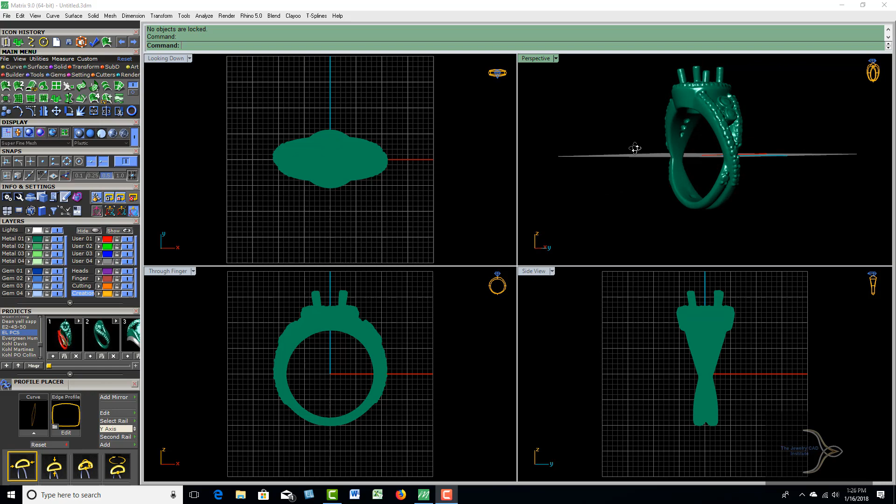We've brought this in as an STL file, and our workflow is going to be trying to make a wedding band that'll go along the side. I'm not going to put any diamonds or anything like that. I'm going to be using Matrix 9 in this case, but you could do this in Matrix 7, 5, 6, whatever version you have. Pretty simple way of doing this.

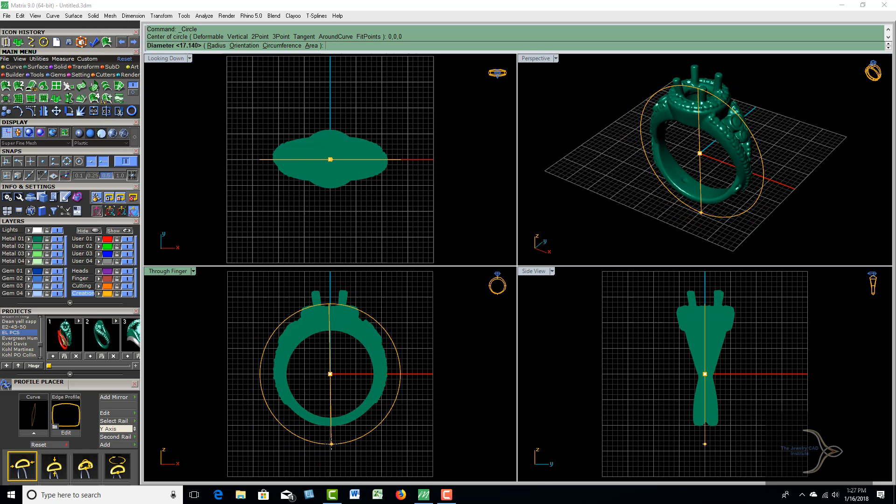First of all, we'll get a circle here on F4, and you want to make sure that your ring from the eLUXE3D scan comes in centerpointed, along F4, so we can get the proper ring size. I'm going to zoom way in here in the through-finger viewport, left click there, and now I want to move this out a little bit.

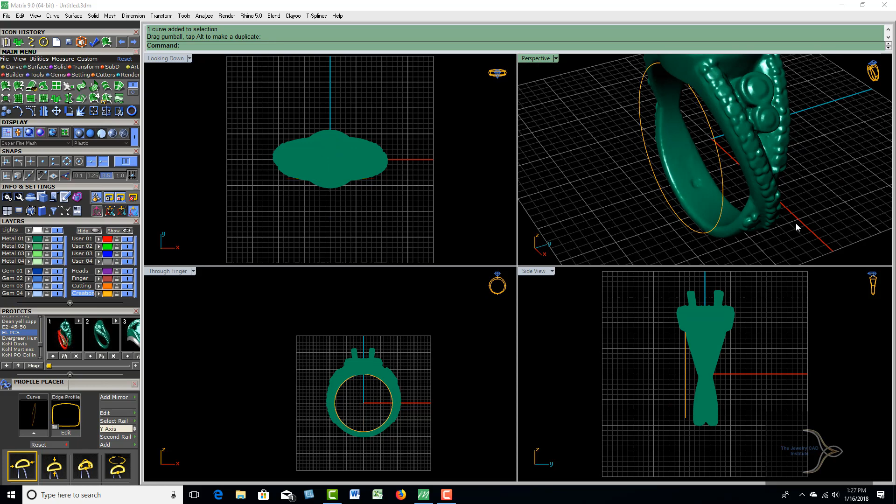I'm a huge proponent of mastering curves and surfaces, so we're going to try and do this from different views to get our curves properly situated. What we're going to do is trace this side over here, a little bit along the outside of this piece. You really can't do it other than free form - if you try to lay something perfectly along here, that's okay. We can just trace this guy right on up this side.

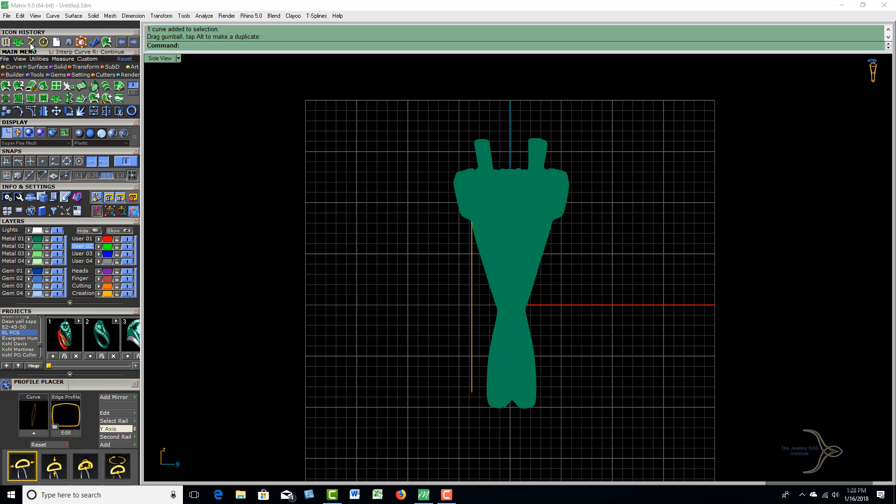Let's go to User 02, and we're just going to go to the curve menu and use our Interp Curve tool here. All I'm going to do is come right up alongside of this, and be as perfect as you can, but in reality you're going to have to make some adjustments anyway in this piece once you get it made, for various reasons.

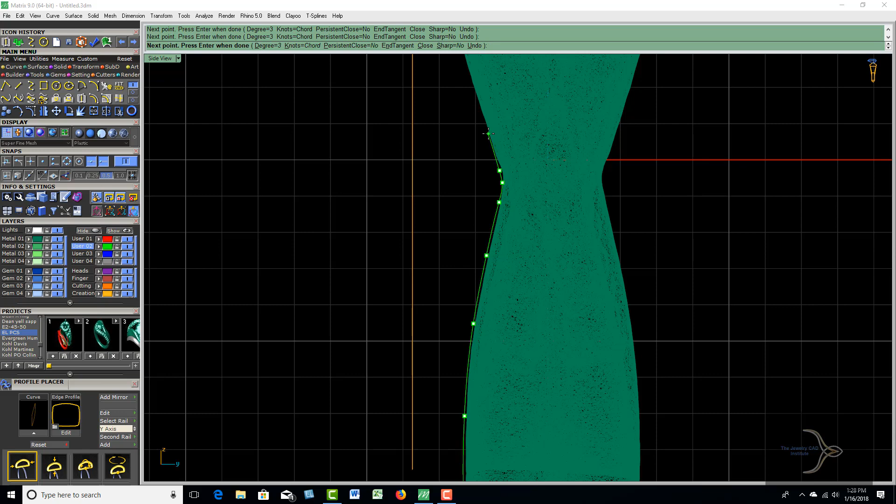You have human intervention, you have a casting that shrinks, you have a polisher that's a gorilla and he wants to come in and just polish everything away. So there is some human element to this. Didn't want to do that, but hey, we'll rebuild it when I get up here anyway.

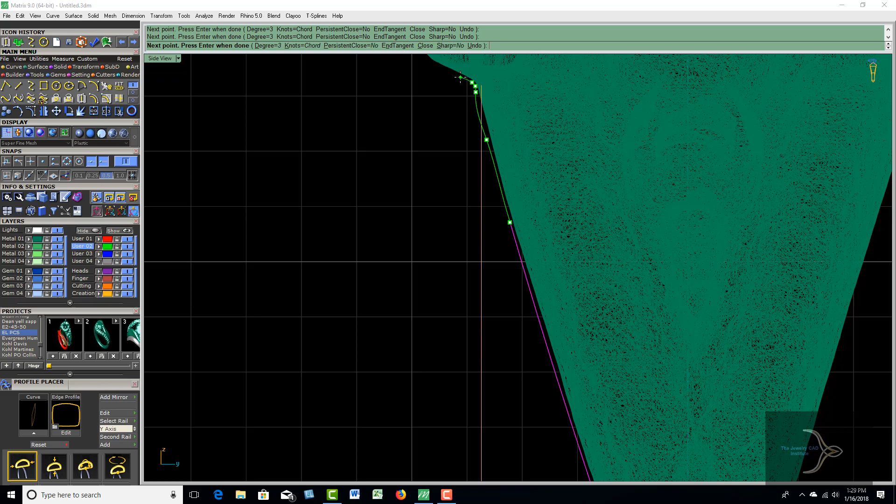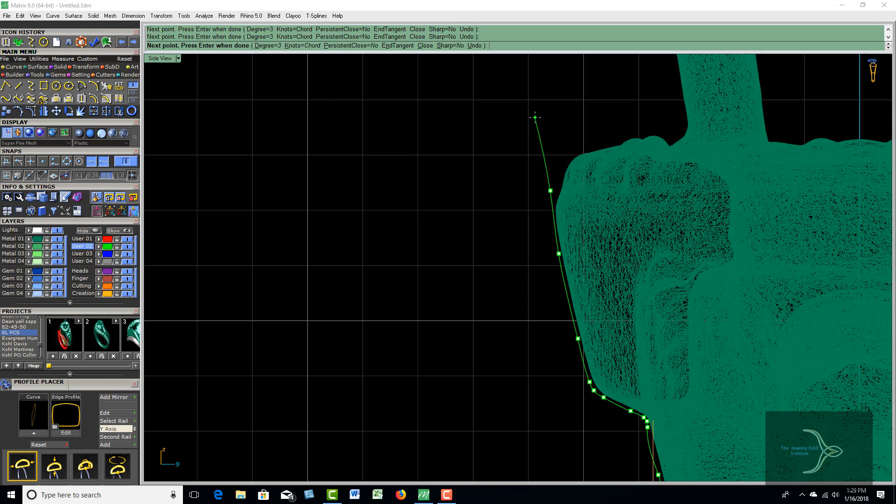Whenever you go around a sharp curve like that, just put about 3 knots there. I'm just going alongside here as best as I can - like I said, it doesn't have to be perfect, just close. You can see how many faces this thing has - it must have over 1 million, I'm thinking.

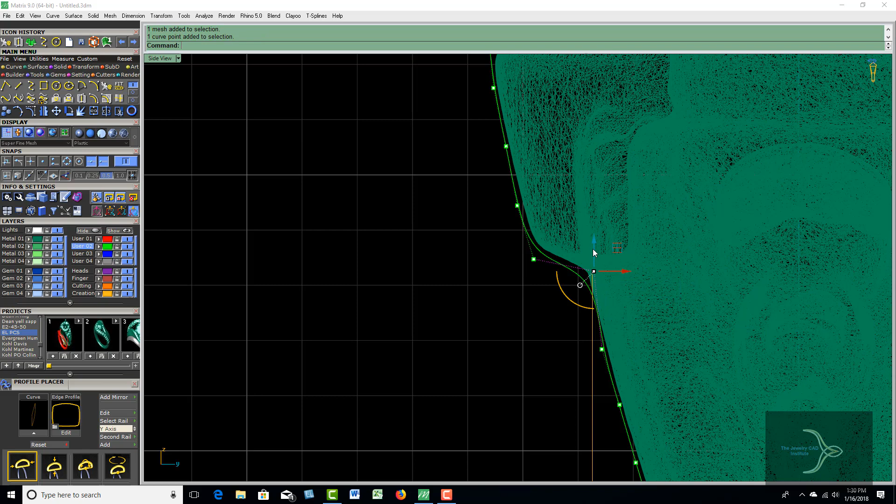I'm going to go ahead and join these two curves up, and then I'll go ahead and rebuild that. You probably won't have to - I'm going to build it at the same amount of points so we don't change the curvature of it very much. Let's see what we got here. Changed it a little bit more than I wanted to there, okay.

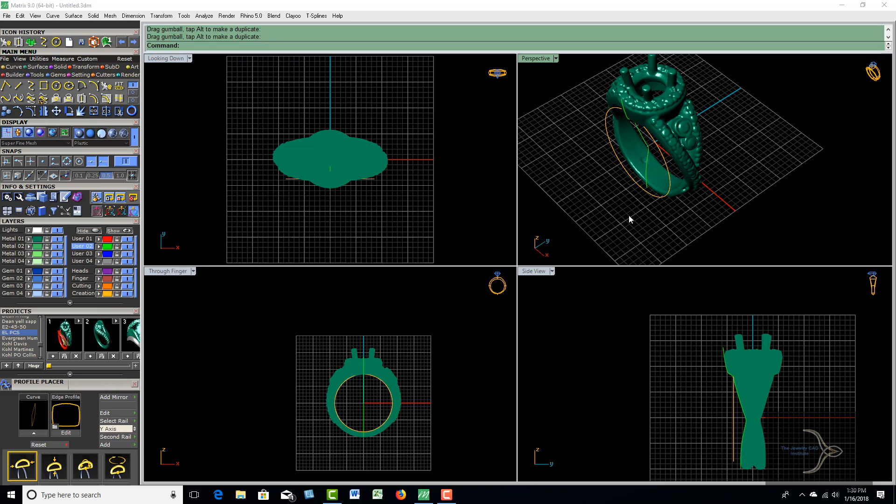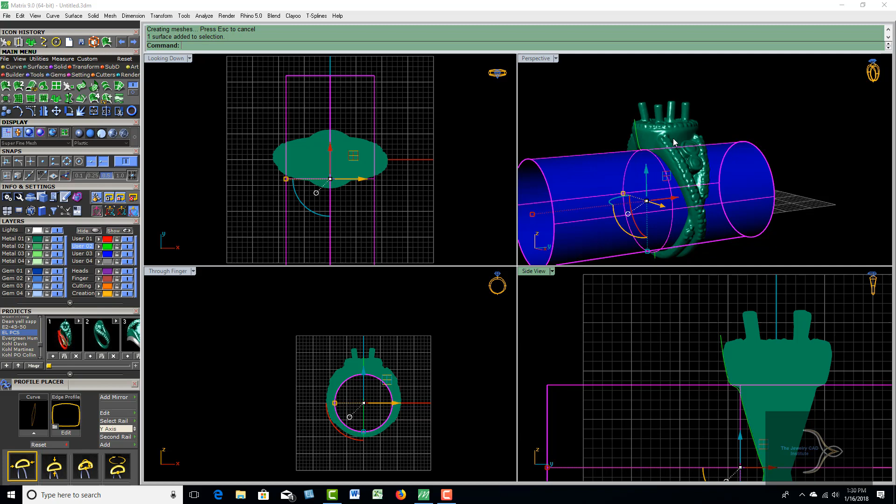Now we've got this curve that we are going to sweep something around here in a minute. That being said, just to show for visual - you don't necessarily have to do this, but for visual - I'm going to go ahead and extrude this as a single surface, and do it straight. All you got to do is hit enter, and boom, out comes your surface. We'll change that to something darker like blue. We're also going to take the curve that we just made and extrude that straight.

Okay, so we've got that. Yeah, we'll just put that in a little job baggie over here.

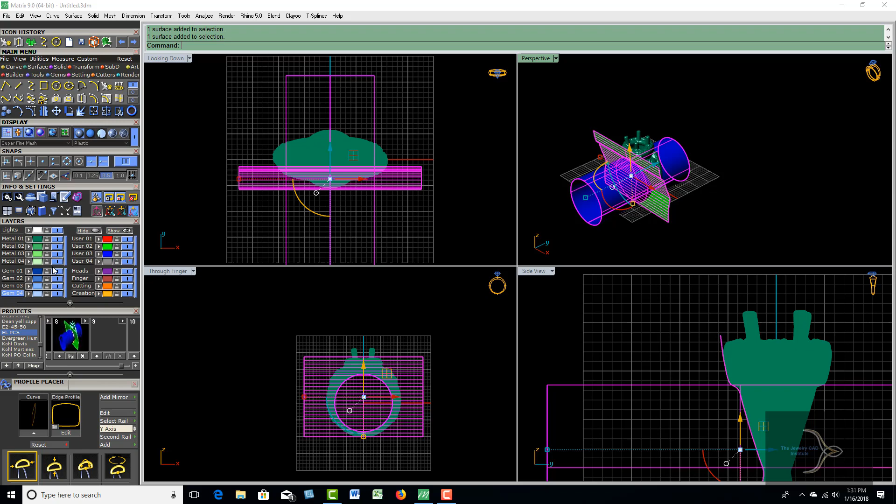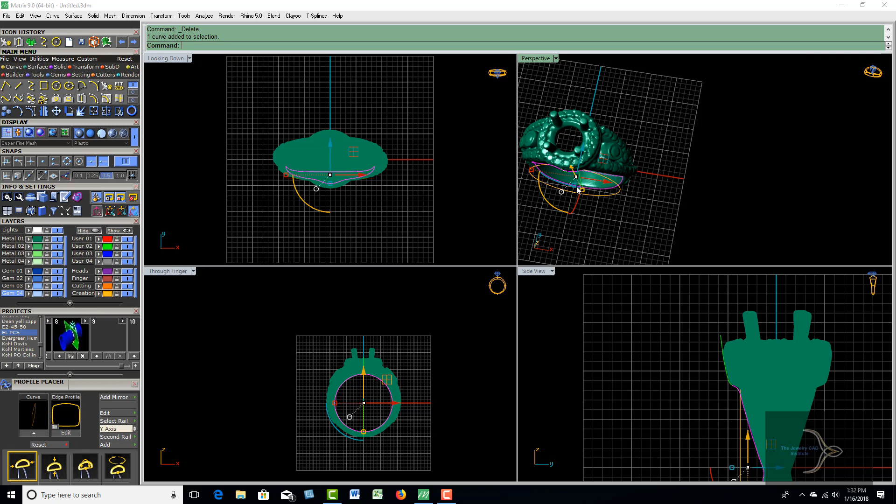Okay, so we want to do a curve intersection here between these two surfaces, and that's going to give us a curve that we can sweep a profile around. So let's go ahead and choose this surface and this surface. Curve menu, let's make this Gem 04, make it a lighter color here, you could even make it white if you want. Hit this intersection and then hit enter, and then we can get rid of the surface and this one. You'll now have this curve that pretty much goes right around what we're looking at here. The key is looking at this round part here.

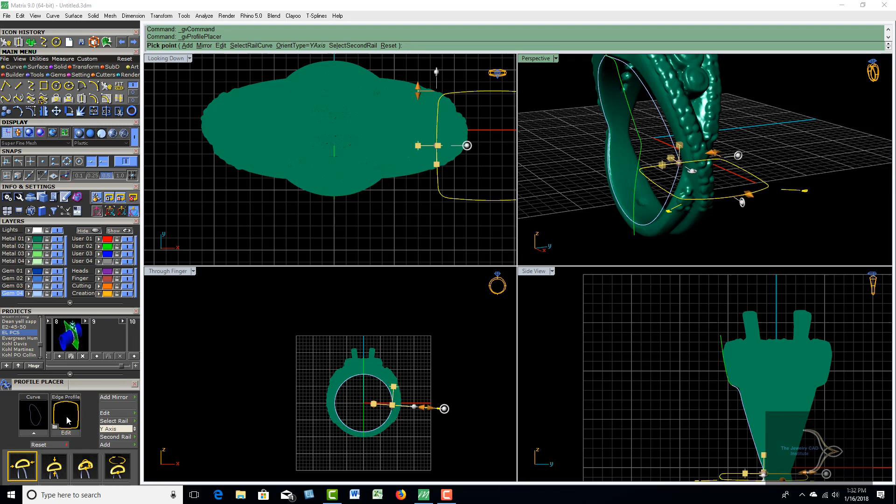Now, I really don't need this supposed curve or ring rail, as you might think. We're going to take this profile or this curve, and we're going to put this profile on it. Now, I'm going to start it down here at the bottom at 0, and then we're going to adjust it to the size and width we need.

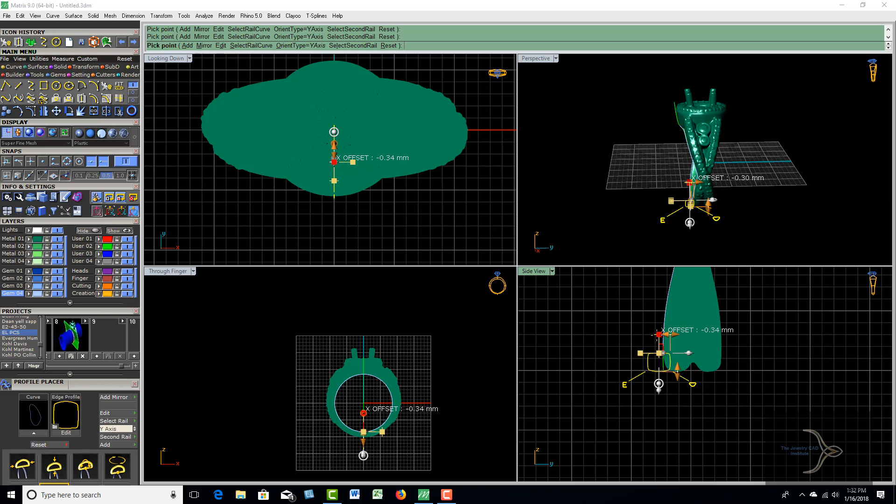Okay, bring it down to about 1.6, I think, is what we came up with before. And just depending on how wide you want your ring, I mean, we can make it, I'm going to make this 1.7, 1.8, something like that. 1.9 is fine. And then we're going to move this out with an X offset so that we're riding on the outside of the rail. Once you get it there, go ahead and hit enter.

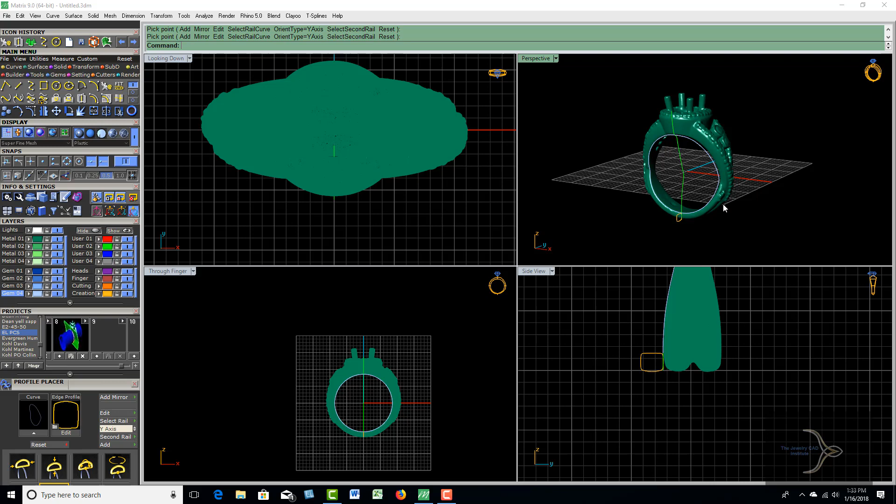And then all this is going to be is a single rail sweep. Now, if you wanted the band to be higher up here, all you got to do is add a profile here, come up here, add another one, then sweep those two together. You can offset this curve here outward so that it becomes a 2-rail sweep. Again, it's your own flavor what you want to do.

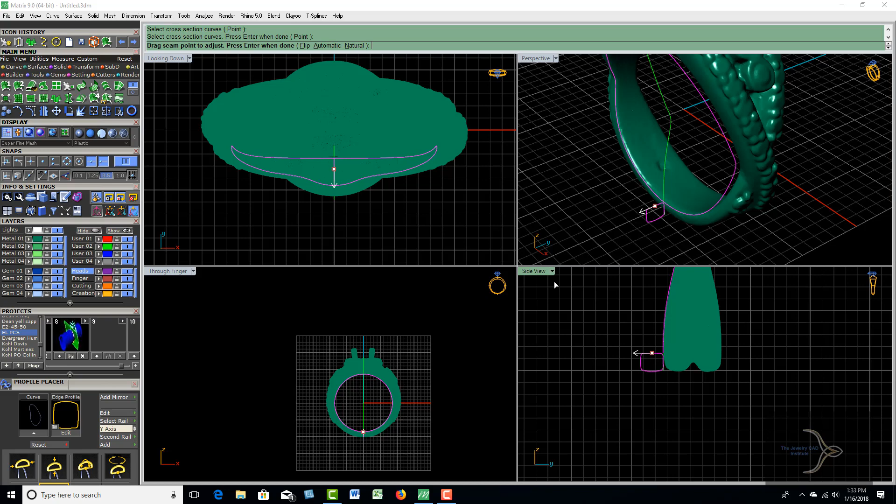Let's go ahead and do a 1-rail sweep this time. We'll use this rail as profile, enter, and then let's make it heads layer, and we'll just say okay.

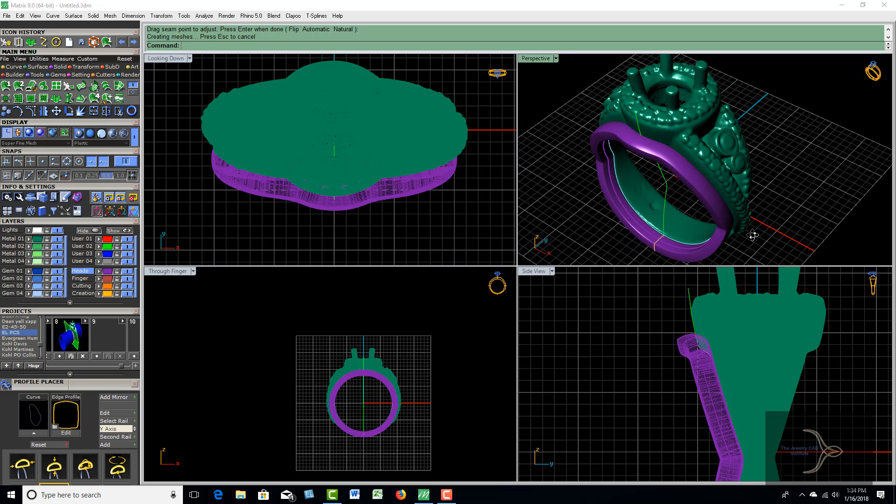All right, so there you are. Now, is it exactly perfect? We're along the side of this thing. It's a little off here and there, but let me tell you something, that's a pretty good rendition of what you're going to need to make a band go along this ring. Pretty good match. That's a second workflow that we've worked out for this same ring.

And of course then all you got to do is mirror that over and you've got your piece. We're the right size and it's ready to go.

Okay, so the workflow with the curves: basically your circle first, then an outline in the side viewport, extrude your circle, extrude your outline, get a curve or surface intersection going to create an intersected curve, and then just get your profile out there and go for it and sweep it.

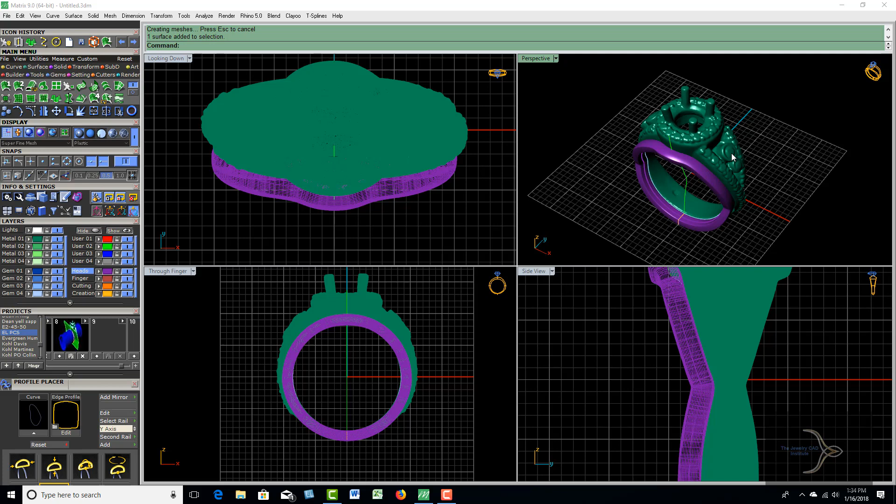Real simple. And the mounting coming in from eLUXE3D is right here, and this is a new band, and this band is a poly surface. Let's go ahead and run a check on it. I always like to make sure that we've got a decent mounting here. Pretty easy to put that together.

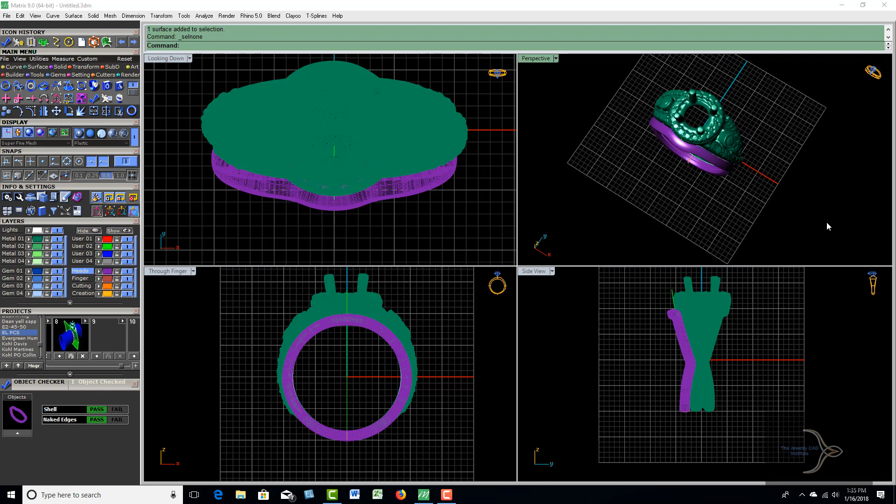All right, this is the second way to do this. The first one was by using Cage Edit. This will probably get you a little closer as to what you need as far as being right up against this particular ring. Thanks for watching.